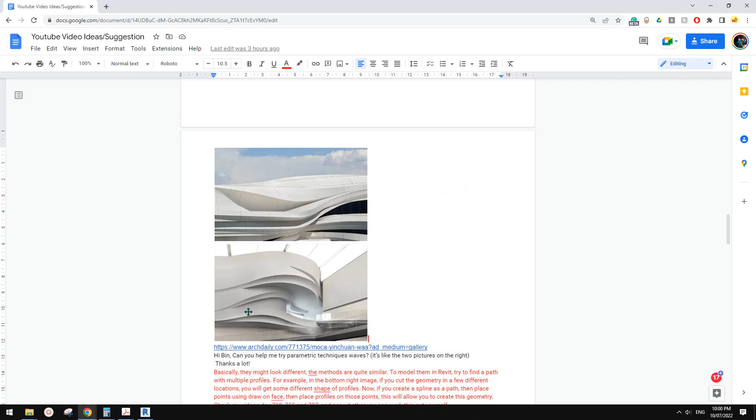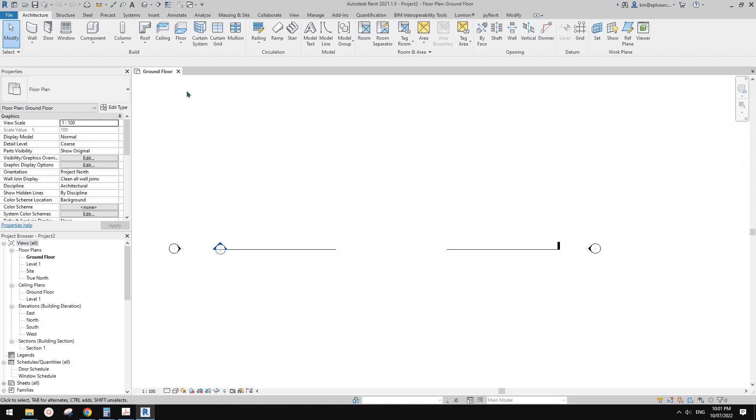Okay, so let's start. First, we're going to do it in a project. We're going to use model in place mass. Let me just create a new model in place mass. Okay, so let's start.

So first, to create something like this, we need to. Basically, it's like a sweep with multiple profiles. So this is how we're gonna model it. First, trying to find a path. For example, this one will be something like this. Then along this path, trying to cut. Imagine you cut this shape, and then you will get some different shape, so profiles. So let's just do it.

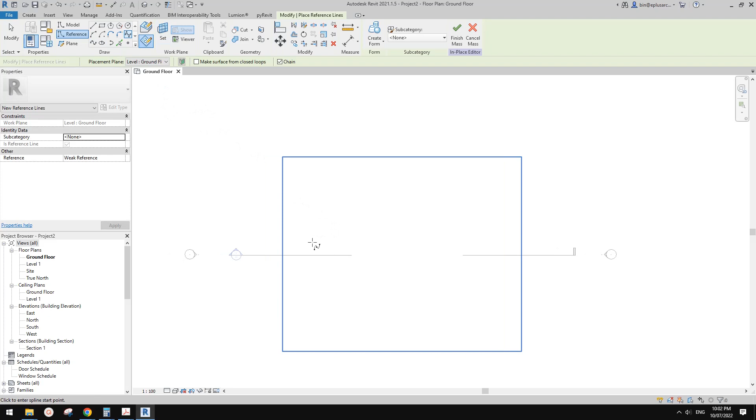First, I'll just use reference line and spline through points, or actually, hang on, let me just have a look again. It doesn't. Let's try different. So most of the time I use spline through points, but you can also use just spline. Once you use spline, it will be placed onto one plane, so it will be flat. Okay, so it's okay because we can just use a spline, and we can use different profiles on a different level or different height, and we can also create that shape.

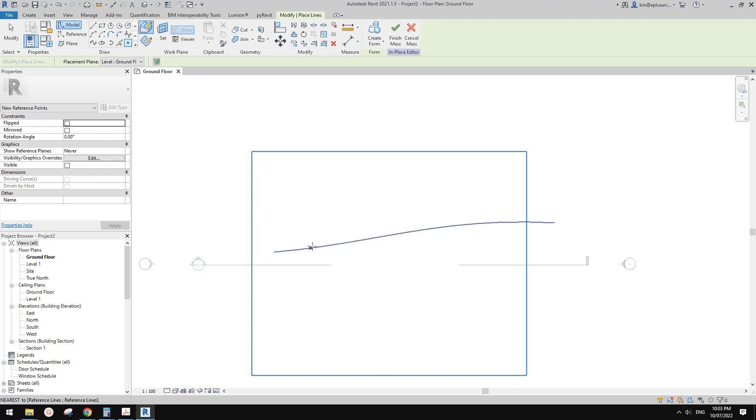So this is a spline, and then I'll just place a point, use draw on face, and place it roughly here. Okay, and then maybe let's go to 3D view, it's a little bit easier to do it that way. So this is the spline we did, and this is the point.

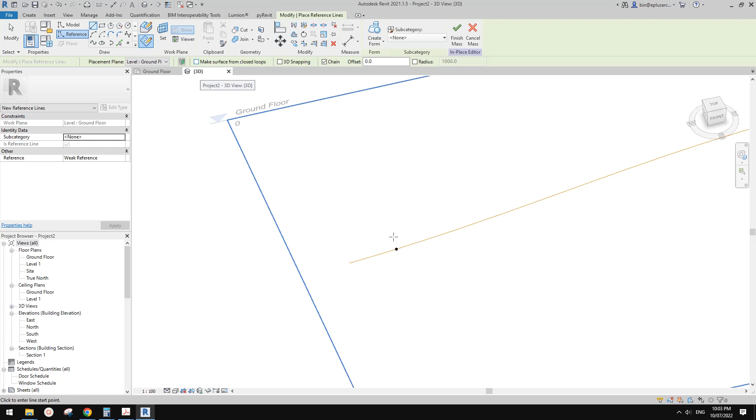So we are going to place. First, draw a world, draw on work plane and create this profile on the work plane of this point. So set, pick this work plane, and then see this shape. So this is the plan. So we're going to draw this first profile.

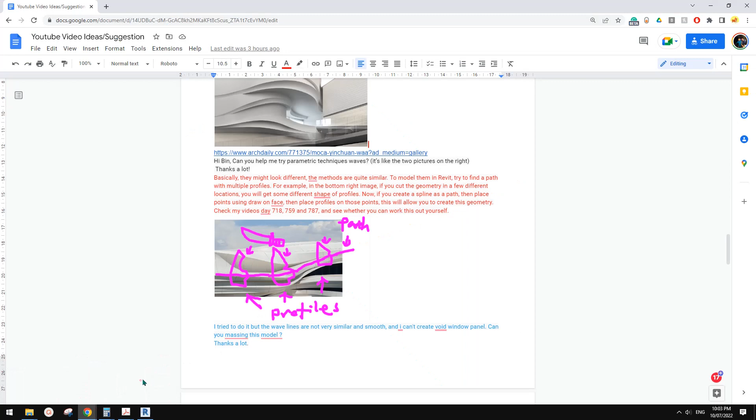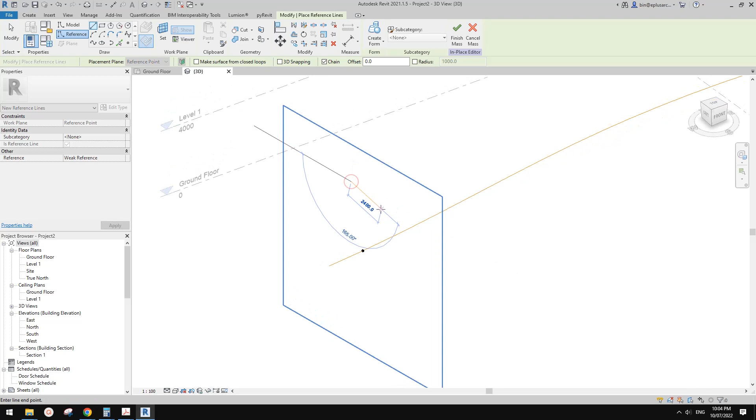Okay, so you can see, I'll just increase the size a little bit. So the first shape looks like this. It can be a straight line, it can be arc. Let's just do it roughly. So like this, and let's add an arc and some. Let's have a look again. Go down there, up.

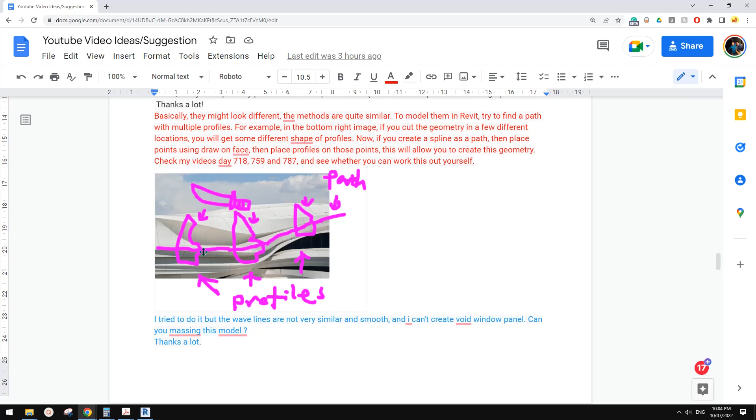Okay, so let's continue. Reference, so go down there, roughly, okay, so something like this. So this is the first profile. You will see all these reference lines, all placed onto the work plane at this point.

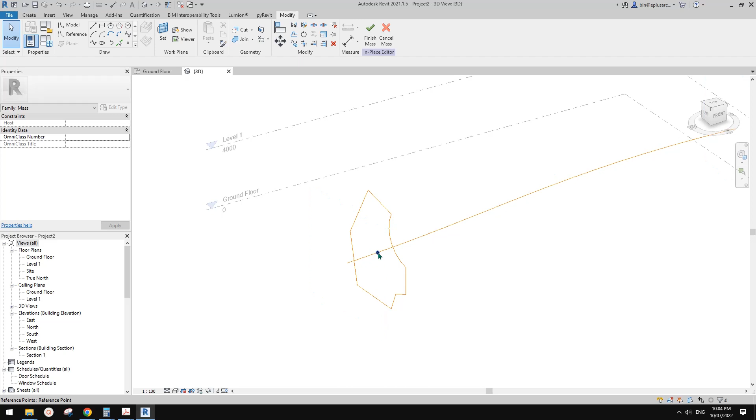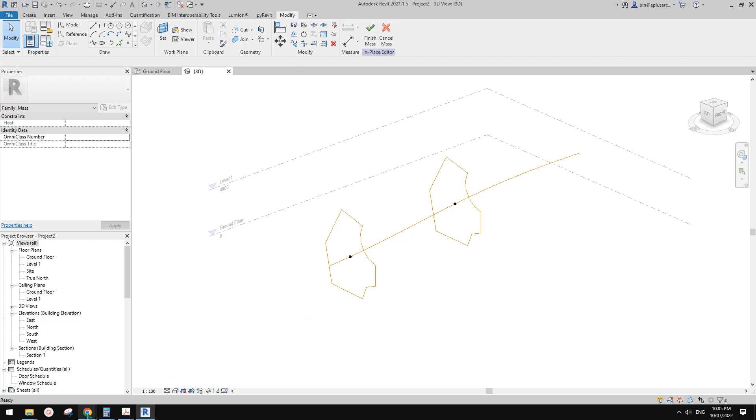So if you do it correctly, you can move this point. So now we can do this. You can just create another one and do all the lines, or you can just copy it and pick new host. This one will be another one, but because the shape is different, maybe you can just adjust. For example, you can select.

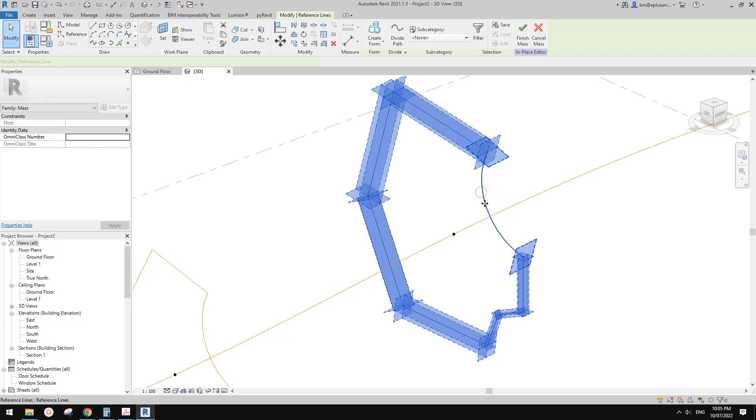So you can select these points, and once you select all these points, you will see this little circle, which means if you drag this circle, you can adjust these 2 points. Okay, so I can do it this way. And for the arc, I'm not sure if it will work. Maybe we can still do this, but I'm not sure. I don't think we can do it this way.

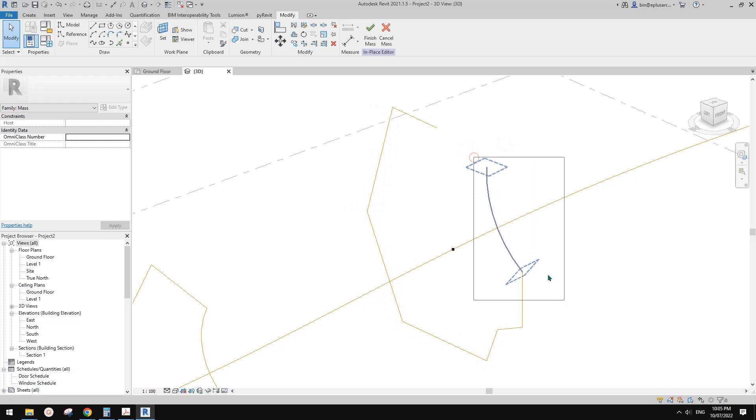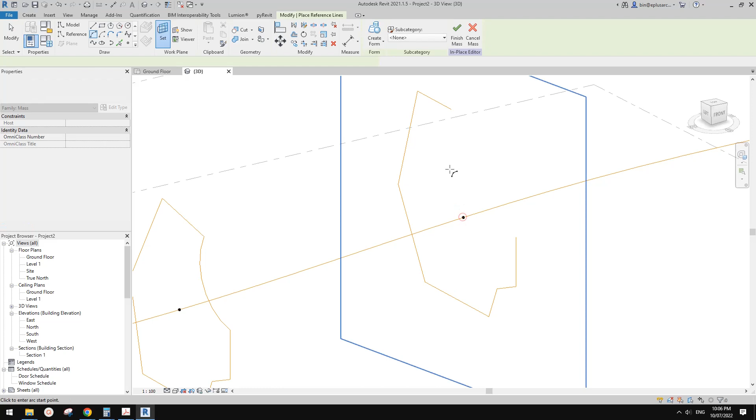So for the line, it's okay, you can tab select to adjust the line, but not this arc. For this arc, we probably just need to let me just delete it and do it again. So we're going to create another one. Oh hang on, no, not right. So if I create another arc, just make sure - see, it's actually placed onto the work plane of this reference line, which is not correct.

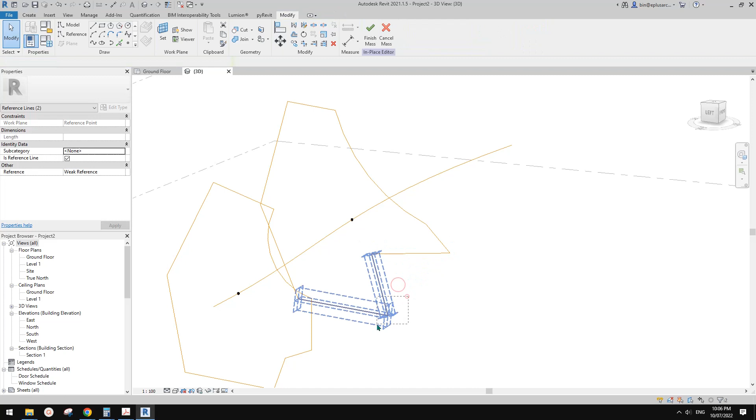So just make sure set work plane and set onto this point, and then we can just finish this. Okay, let's have a look. Different and go straight, yep. So let me just try to just make it different. Okay, so something like this. And okay, so this is it. Maybe this one go this. Okay, so and then just do another one.

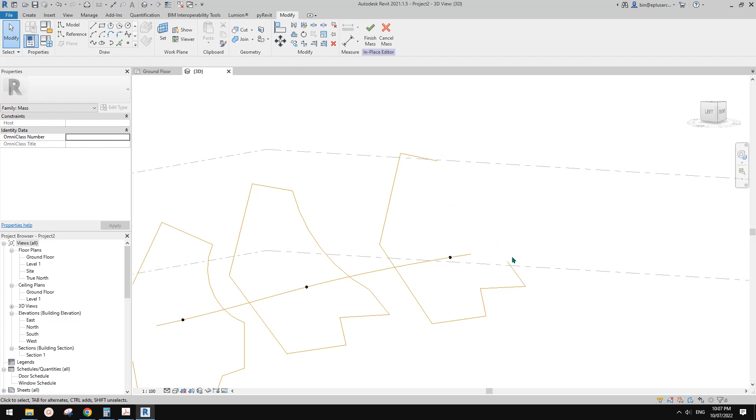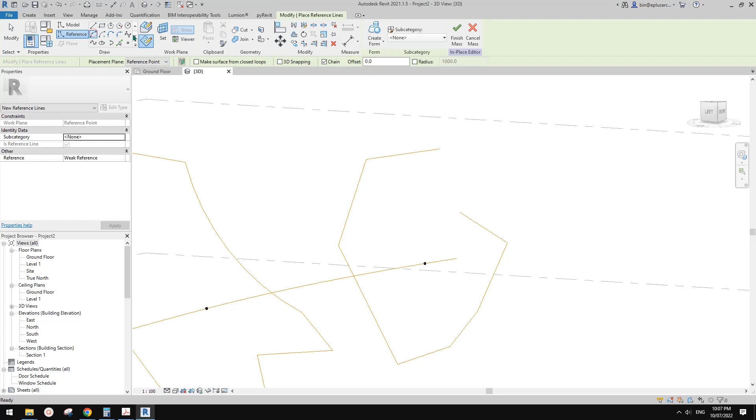So then pick new host, and then once again change the shape. So okay, so this one will be - I'll just remove this arc first, and then adjust all these lines just randomly. Okay, and then I'll add another arc, maybe just make sure reference arc, draw on work plane, set work plane, pick this work plane, and finish it.

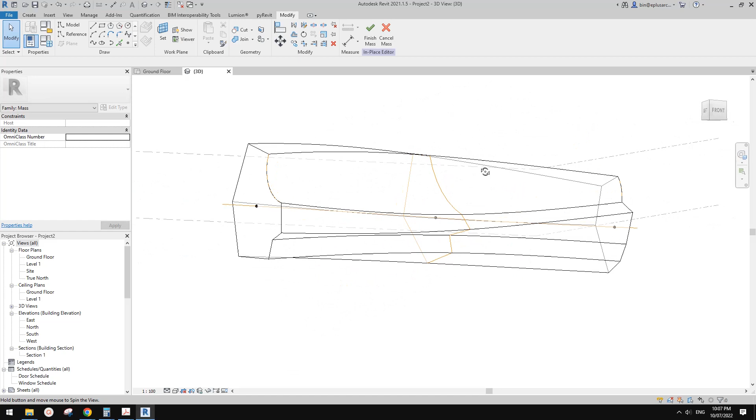So maybe this time let's do this. Okay, so now let's select all these reference lines together with this path, create form, and now we have some interesting shape. Okay, so oops sorry, my mouse is not okay, better.

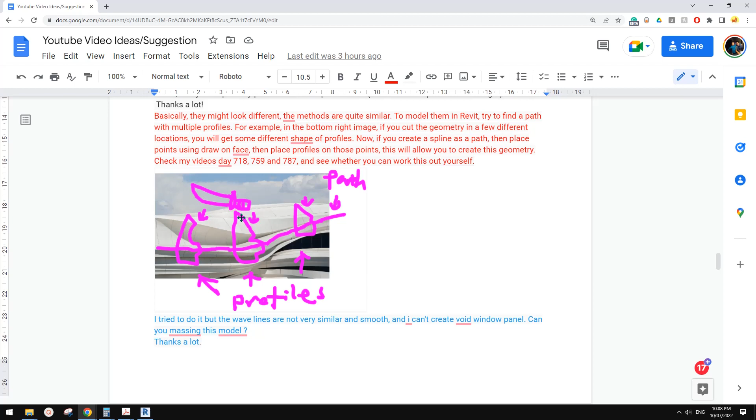So yeah, basically, if you trying to use the shape like this, it will be able to create a mass similar to this, but because I just randomly created some profile, it's probably not the same, but this is the idea. It's a little bit hard to see because currently the material is default mass, which is transparent. I'll just maybe let's just go find the default mass material.

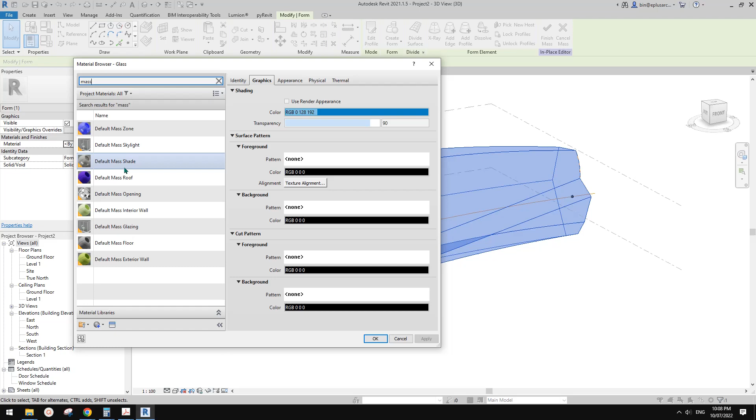Where is it? Not here. I'll just go check. Okay, sorry. Just go to object style.

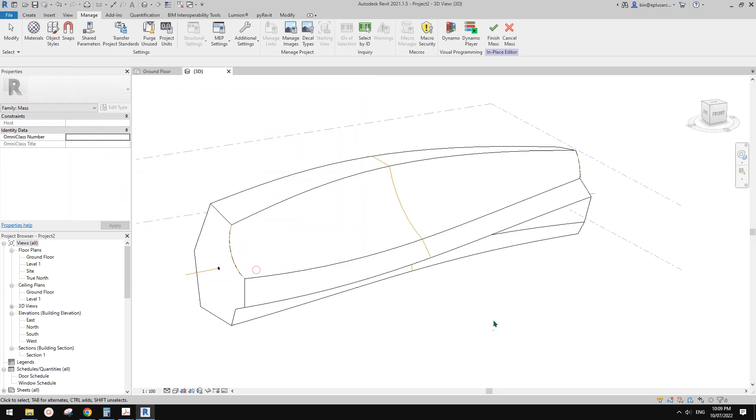Sorry, default form. So this is because it's a transparent material. You can see here. So if I just turn this down, it now becomes a solid material. So let me change it to shaded.

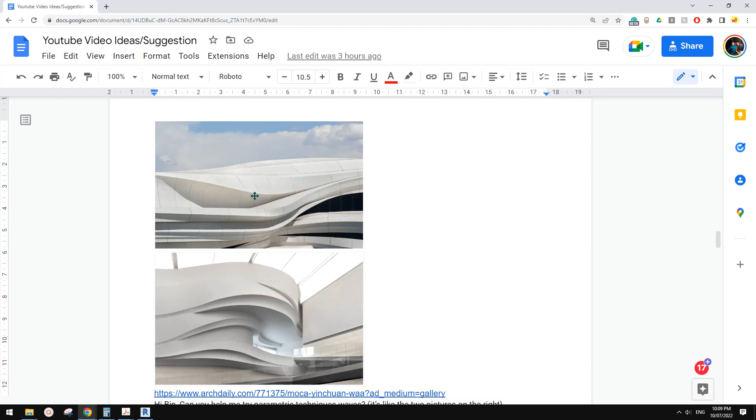Slightly easier for us, maybe I'll change to consistent color. Okay, so that's better. Anyway, so this is the mass, let me have a look. So see these patterns - maybe that's a gap between all those patterns.

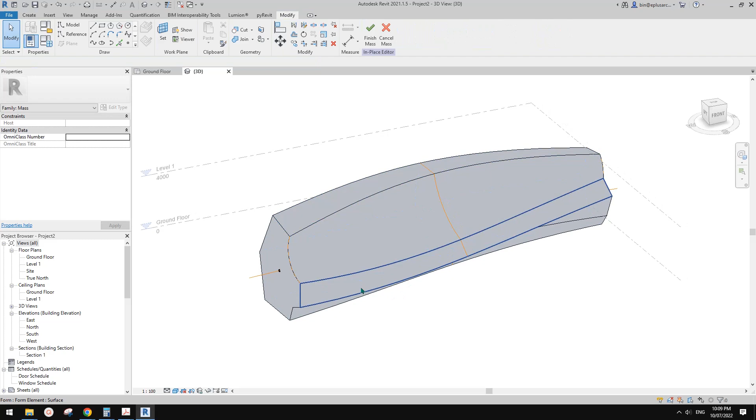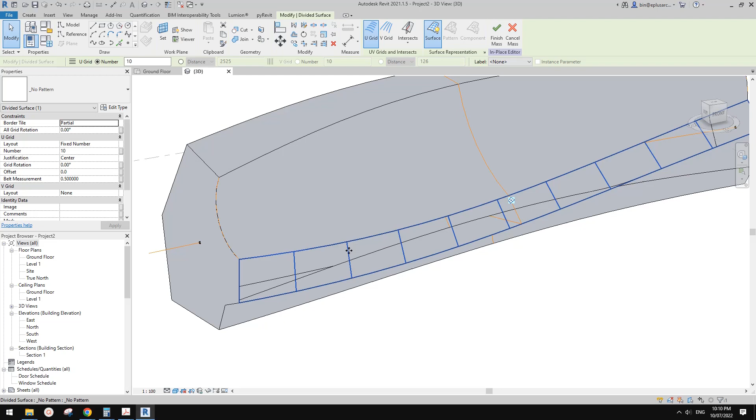Not sure what's the best way to do it, because we can tab, select this face, and use divide surface, and I'll turn off the V, and then we have this. You can try to use a pattern based family, but it will be a flat face, and you can also use adaptive to just place a little adaptive line there.

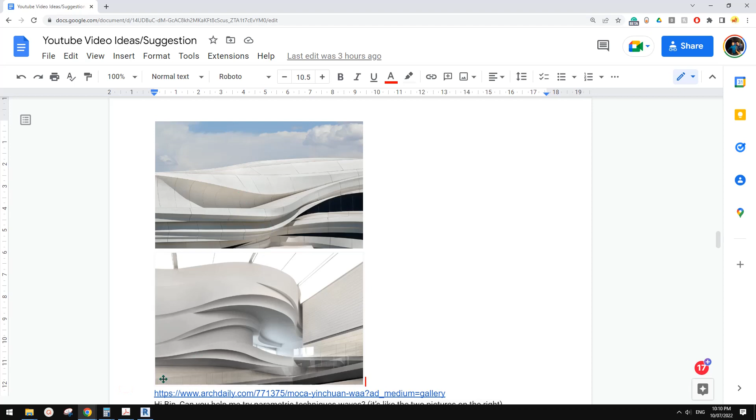And then you can repeat to create that, roughly, the pattern. But I'm not quite sure. Oh, hang on. For this one, I think, yeah.

So I'll quickly show you. For example, I'll try to place some patterns on this surface. So I'll just divide the surface. I'll turn off the V. I'll have the U on. I'll just type in 1.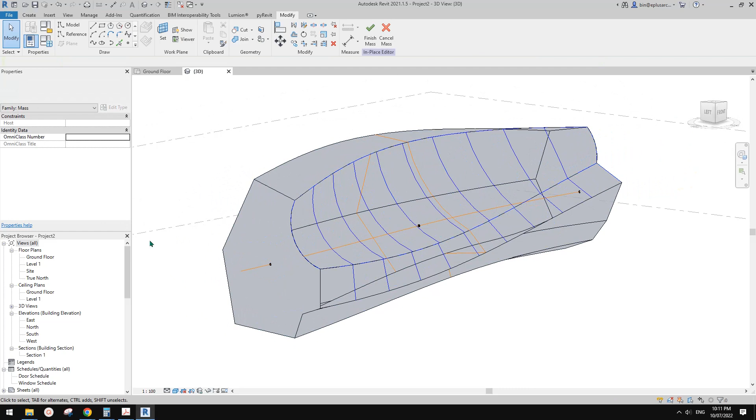Maybe we need 2. We need 2. So the reason why is because we can't just use divide pattern-based family, because it will become a flat surface.

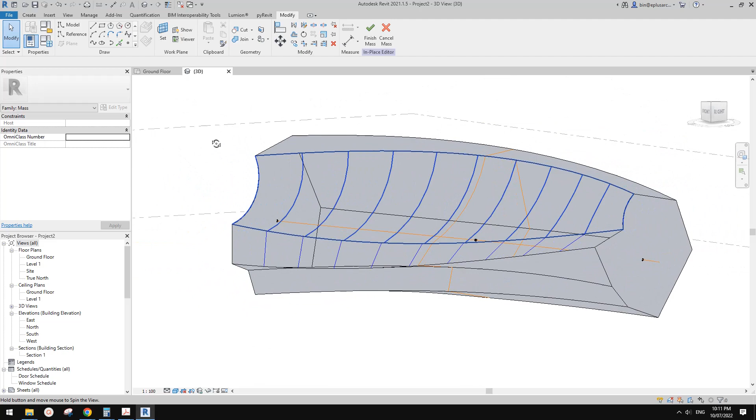So I'll show you why. Okay, so I'll show you. If I turn off the V, so only this - it looks like this is a pattern, but currently, there's no panel there. You can see it's actually transparent.

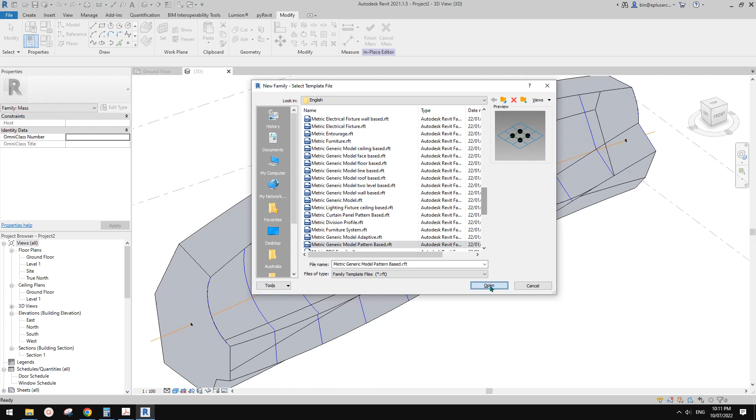It's only the grids. Okay, so if I just go create a pattern based family, I'll quickly create a generic model pattern based. Not here, and if I create a face, okay, I'll load this in here and go to 3D view again, select this divided surface and give it this family.

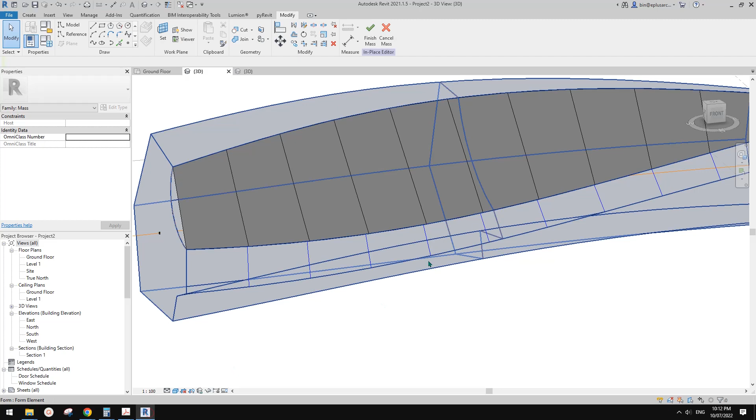So you will see all these become a flat surface. See? So what we want is curved. Yeah, I think it's a little bit tricky for this.

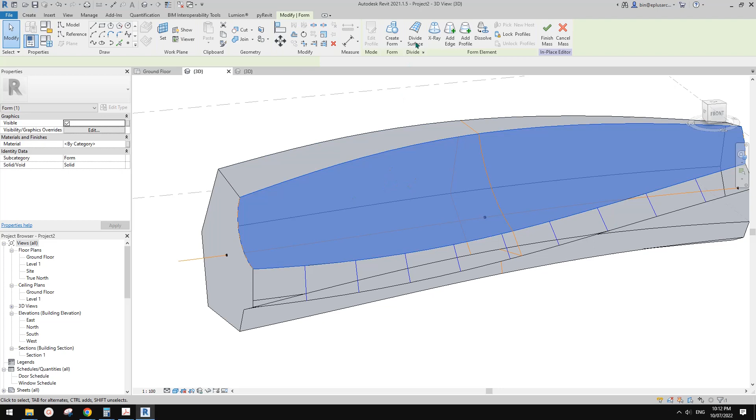We can still do that, I think. But let's just, I'll remove this one. I'll delete it, press the delete key on the keyboard, so we can still have this surface, divided surface, and I'll change this one to 1. Okay, and then we can actually turn on...

Let me just use the original surface. So we still have this original surface, right? But currently this one is a grid. So it's showing here, but when you render, for example, you won't see anything.

So I'll just quickly do a... not sure about realistic. Still see that grid, but if I finish mass, for example, and where's the ray tracer? Not there. Let's try. I haven't used Revit Render for many years now, so I'm not sure about all the settings.

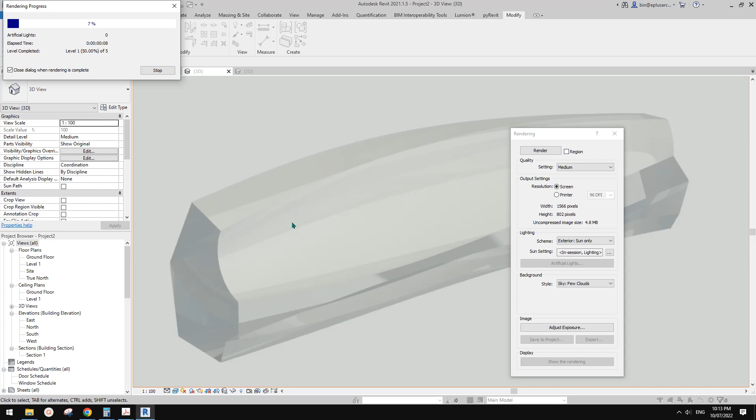But I'll just click on Render. And you won't see these lines. See, it's just a curved surface, right? You can see the curved surface, but you won't see those lines. So let's just stop it.

And so what we need to do, actually I did this before, is just create a little adaptive family, I'll show you. So because we want it to be curved, we need 3 adaptive points, so we're going to just use a generic model adaptive.

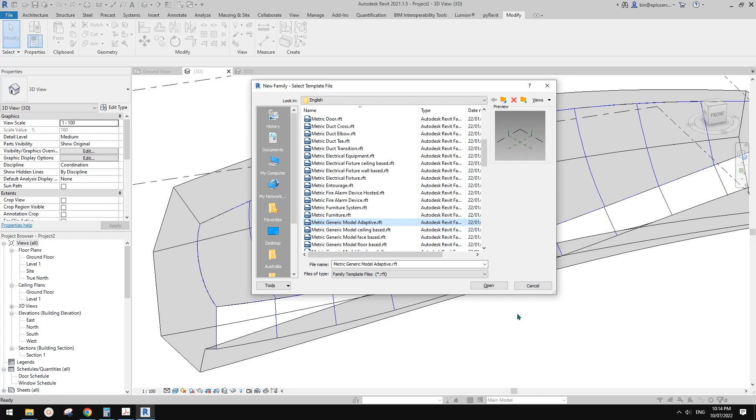Where's it? Oh, maybe I'll just click on this once. So it will be the first generic model adaptive. Yep, good. Okay, so very simple. Do 1, 2, 3. Make adaptive, create a spline, make reference line.

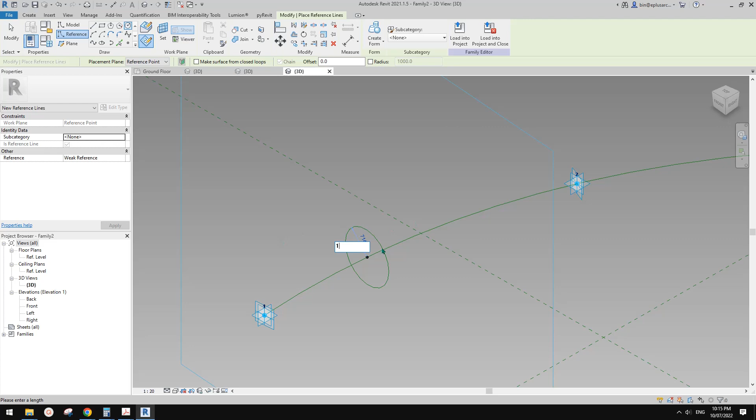Okay, so place a point, just place it, use draw on surface, and I'll just place a little circle onto it. Set to work plane and very small, 10 radius. Okay, and then CC and pick the point, pick new host, and then select them, create a form, select the point.

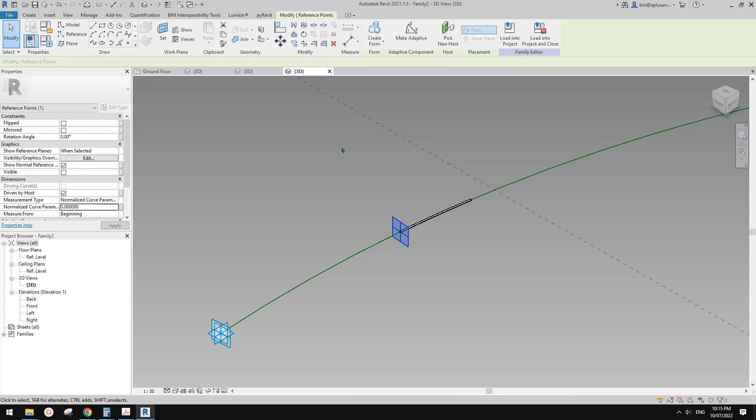Select the point. This one go to 0. Oops, sorry, select this one, and this one go to 1. Okay, so this is it.

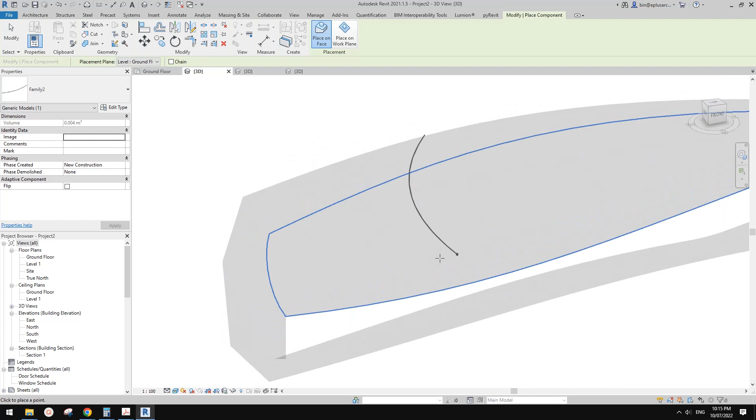And then if I load this into the project, yep, load this into the project and go to 3D view. Cancel it for now. So because we need to see the nodes, go edit in place, select this divided surface and turn on the nodes.

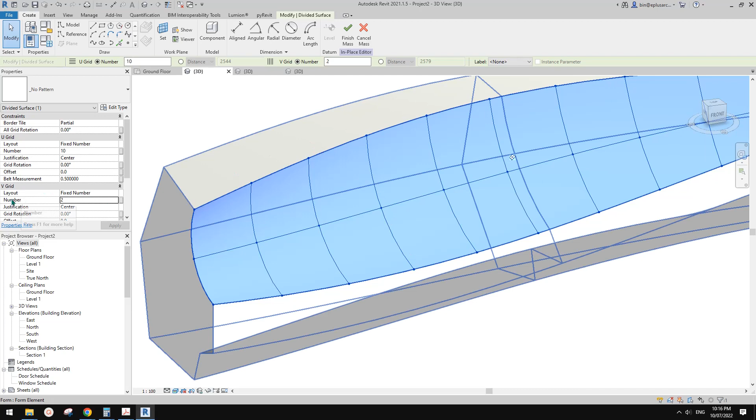So now we need one more, because otherwise there are two nodes - we can't create a curve with 1, 2, 3. So which is two number of grid, we can place a component with 3 adaptive points. And then now we have a little line, so we can repeat, and then that's it.

So now if I finish this and do a little render again. Where's my render?

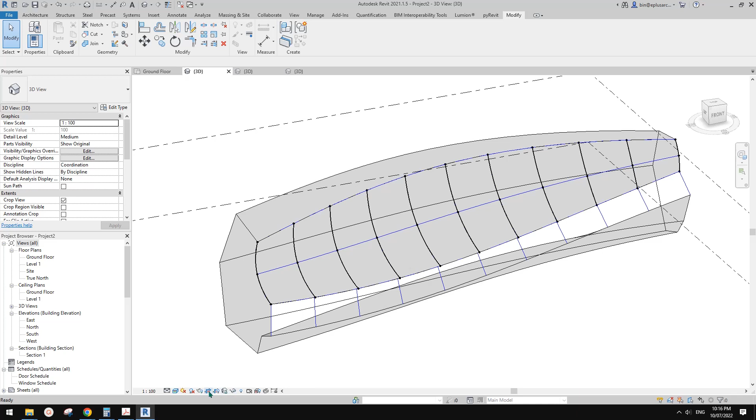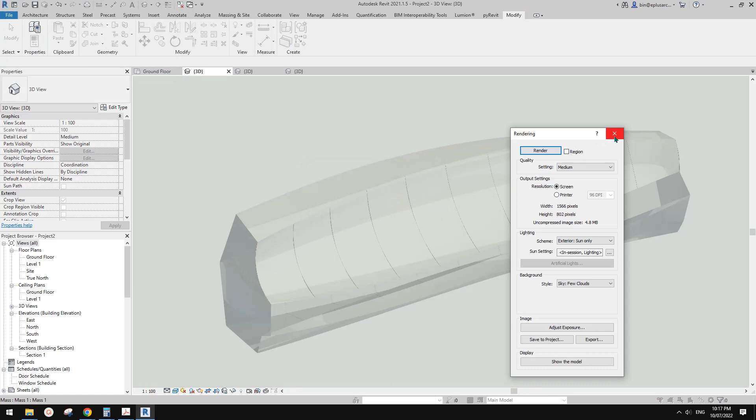Where's my render? It's gone. Oh, I think this is quite interesting - sometimes it's just hidden. So now if I do another render, at least there's a little line there. It's not perfect, but enough for schematic design.

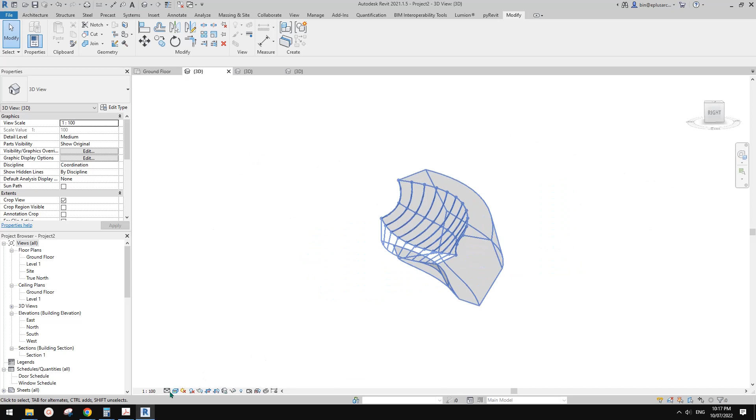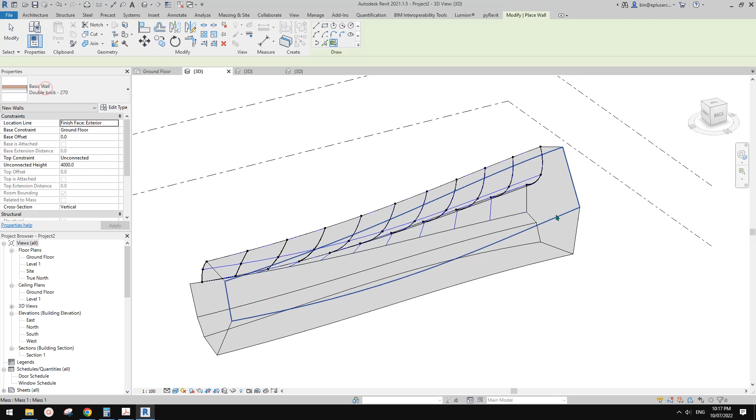So let's have a look at how we can place windows. I think that's the question as well - void window panel. It's a little tricky here because for example, if I want to place a window onto this, first I'll see if I can use wall by face. So we can create a wall like this, and once we have this wall, we can place a normal window. But because normal window is always vertical, I'm not sure.

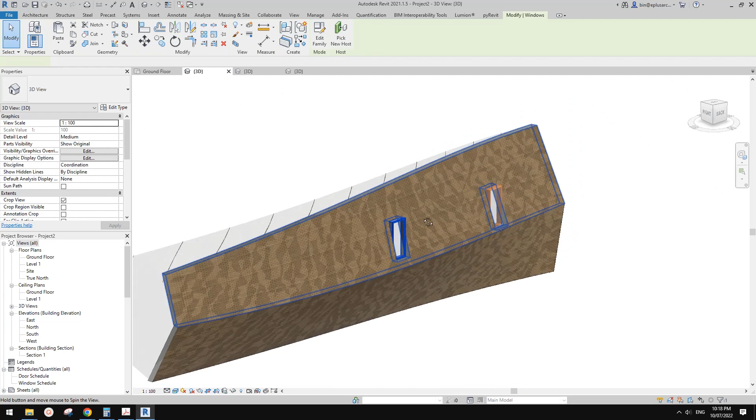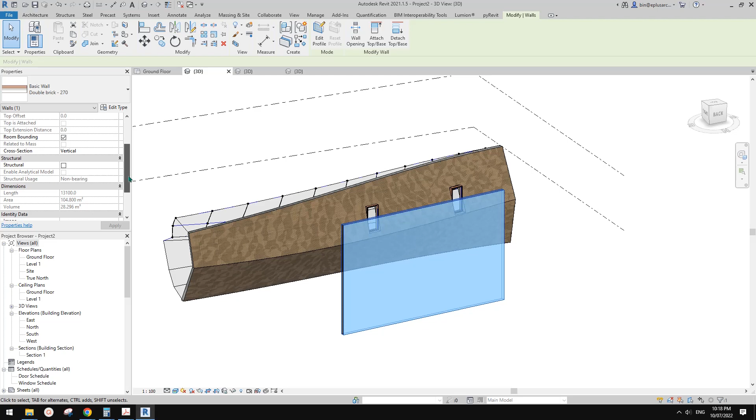Hang on, this is 2021. Do we have some slanted windows in 2021? Or slanted wall? Let me just draw a normal wall and see if... not here. Yeah, I think it's probably should be in 2022.

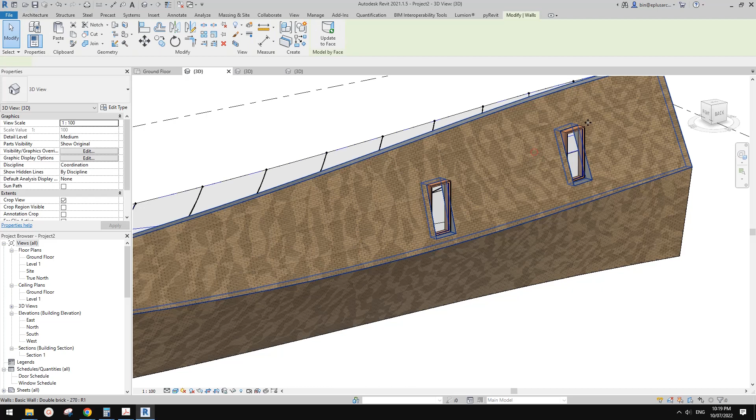So anyway, we can place a normal window on these walls, but it will be unsure how to align with the wall. Okay, let me show you.

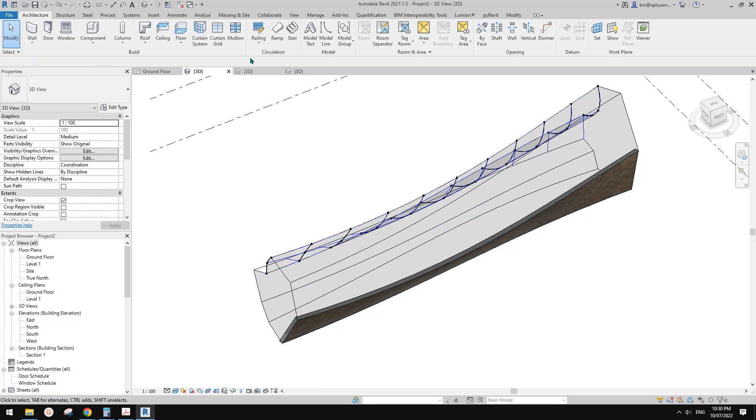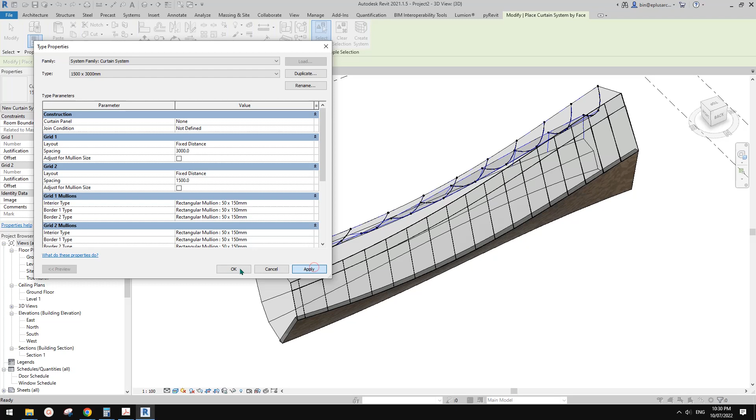If we want to create windows to match the shape, the easiest way is to directly create a curtain system. You can pick this surface and then create a system. You can go to edit type and change all the settings for the mullions. Let me just copy paste and keep all these settings. So apply, okay - now you can see we can create these curtain walls to follow the mass.

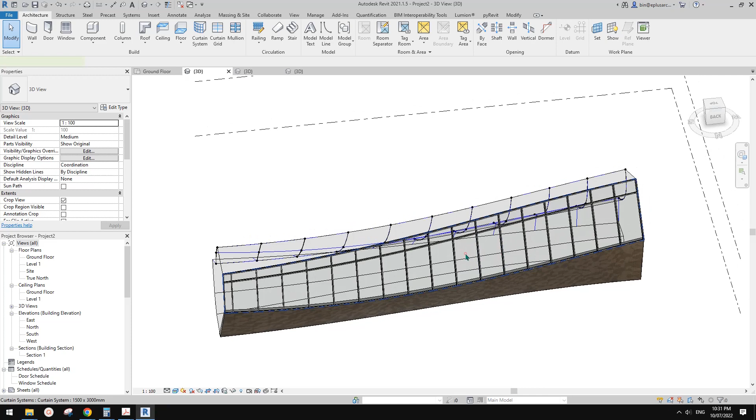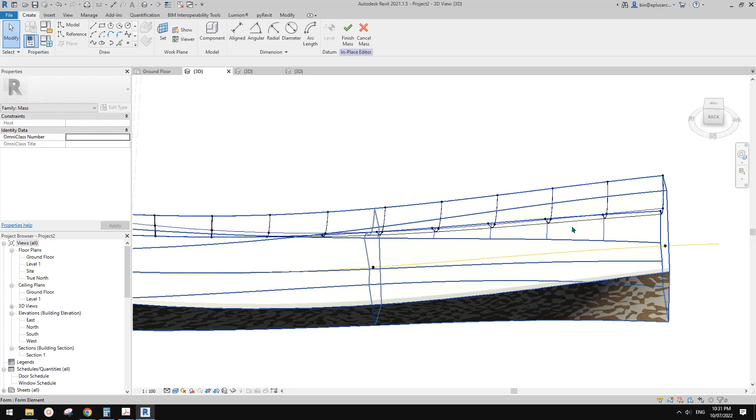If you want to, for example, have a solid wall with only part windows here, let me show you how to do it. First, let me just go edit this mass. We need to create a different surface because currently this surface is just one single surface. So for example, I wanted to add a window here which still follows the shape, but the rest of the wall will be solid. So how can we do it?

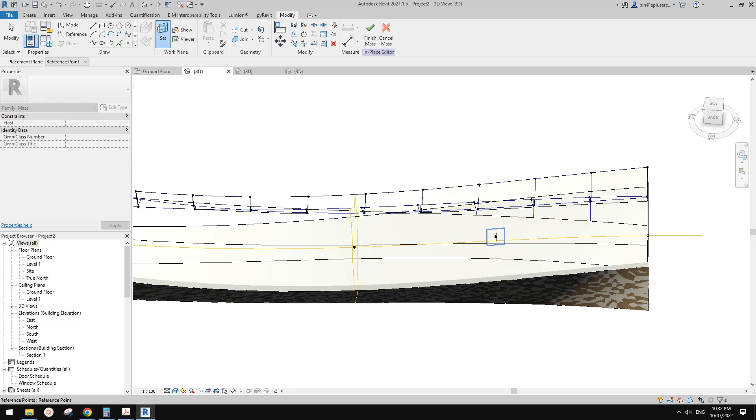So first, I'll just place a point and use draw on face and place onto this surface. For example here, and then I'll use reference line and draw a rectangular shape. Use draw on work plane, set work plane, and try to pick the point. Tab, I'll use this work plane which is not perpendicular, parallel to the surface at this point.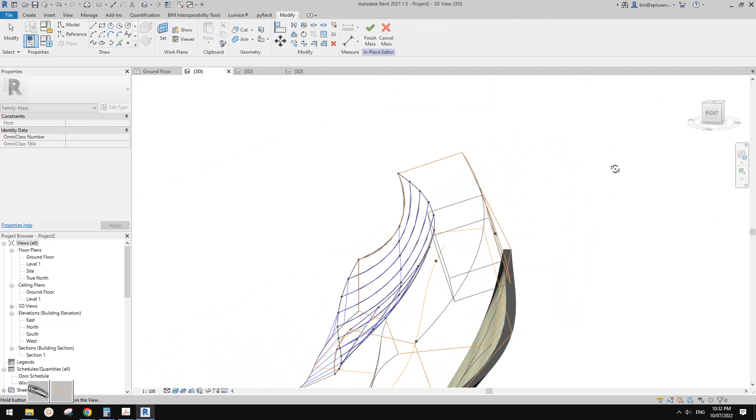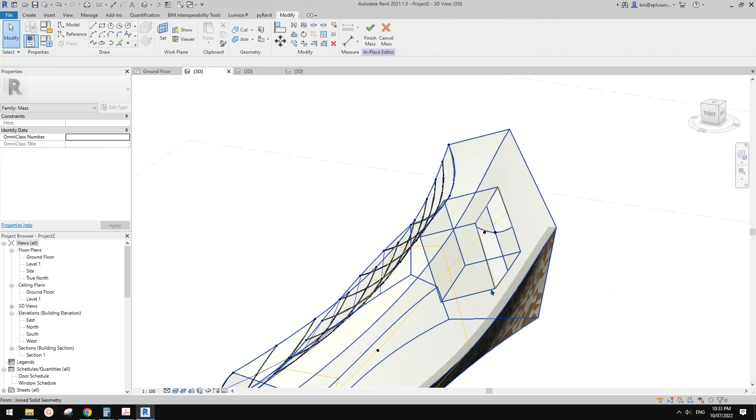Tangent, okay. Once tab, this one, pick, and then I'll just create a shape like this. Then we have these reference lines, and we can create a void. This void doesn't need to be this deep, but it does need to... hang on, it's a bit harder to pick the void. Tab, this one? No, not this one. Tab, this one? Still. Maybe let's try here. No. Yeah. So sometimes it's not a good idea to directly create a void.

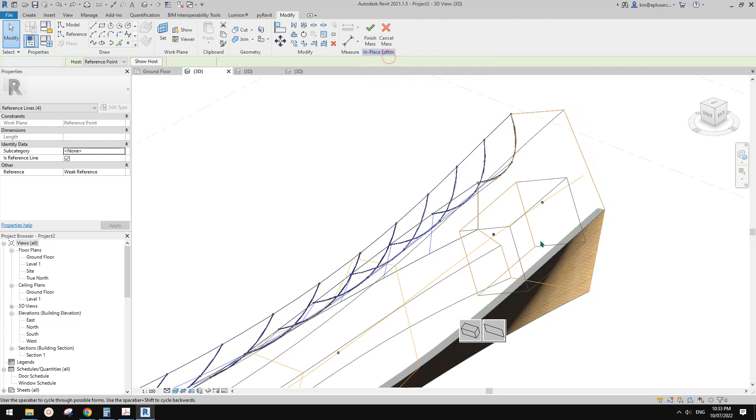Maybe let's Control Z because it's very hard to find that void. So maybe we can just create a solid first. Now let's have a look - we don't need that back, so I'll just type 200, and we also want this one to go there, so let's type 100.

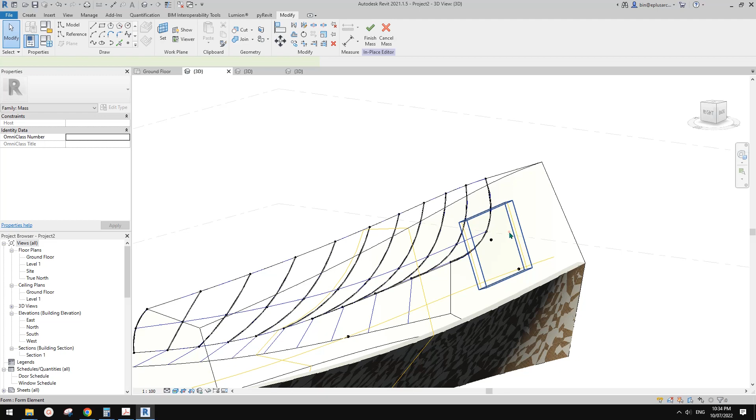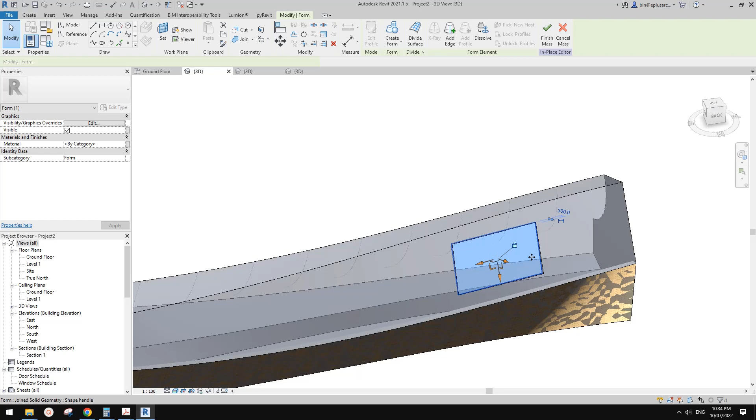And then we can select this solid and change it to a void. Now it should automatically cut. If it doesn't cut, you can just use this tool. Now it's cut, then we have this surface - see this one? This is a surface different to this one, so we can apply a different wall to it.

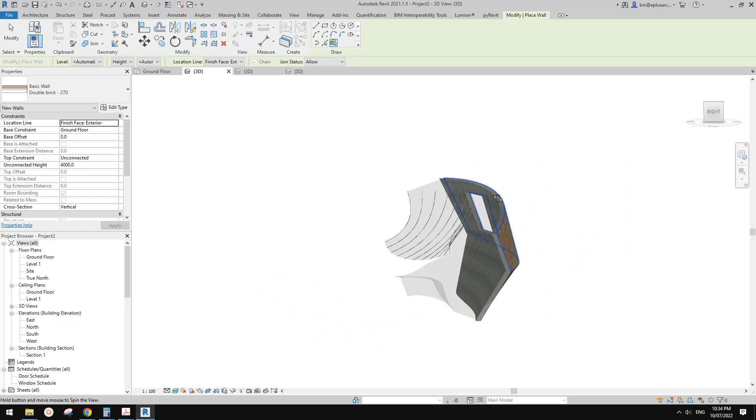So now we can finish this mass, and we can create - I'm going to just create a CS, create another wall, pick face, and pick this one, and you'll see this is a solid wall following this mass. Then we have this opening here, and we can just create - I'm not sure about curtain wall, let's try curtain wall, wall by face and curtain wall. Doesn't work.

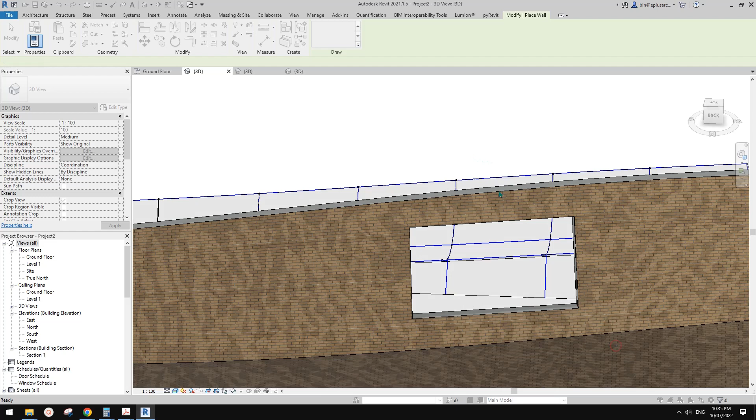So let's try curtain system - pick this face, create system. That's it, okay, so this is it.

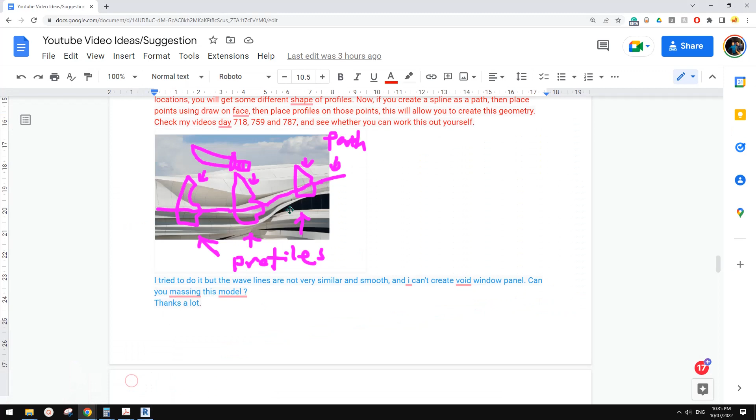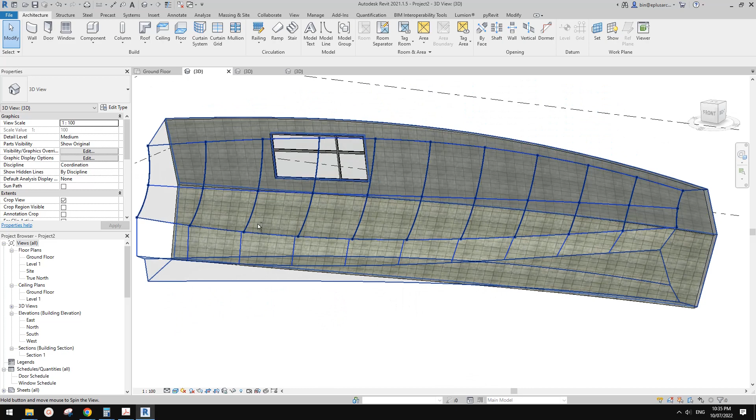So today we talked about how to create this. I know Revit is not very good for this, but if we spend some time, you can still create quite interesting shapes. We also talked about how to place a wall onto the surface, how to add a little details to the panels, and how to create windows - not exactly following the shape, but roughly following the mass.